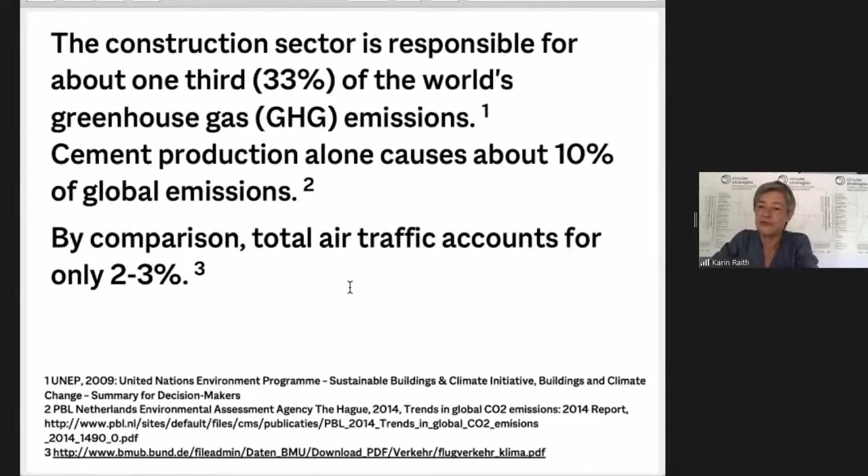In recent decades, not only have more and more natural resources been extracted from the environment, but also more and more land has been consumed for construction. This is, of course, in line with the logic of continuous economic growth, and is also driven by a combination of many factors - primarily exponential population growth, but also the extensive use of fossil fuels, which allows transport over longer distances and thus stimulates urban sprawl.

This is fatal because the surface of the earth is a limited resource that cannot be reproduced, enlarged, or expanded. Land is a really precious commodity. Although we know that in the future more arable land will be needed to feed the growing number of people, we allow huge fertile areas to fall victim to urbanization and be lost to food production every year.

And as the consumption of land through urbanization has accelerated, nature has also been pushed back at the same pace. We are well aware that the natural soil, with its ecological functions, is absolutely essential for human survival. Nevertheless, we thoughtlessly waste it for scattered development and the immense traffic areas required in between.

So what can we do? What can we architects do? As already mentioned, the global construction sector is responsible for about a third of global greenhouse gas emissions. Roughly half of this is caused by the operation of buildings, and the other half is related to the energy used for the production of the buildings. It's important to pay attention to both aspects.

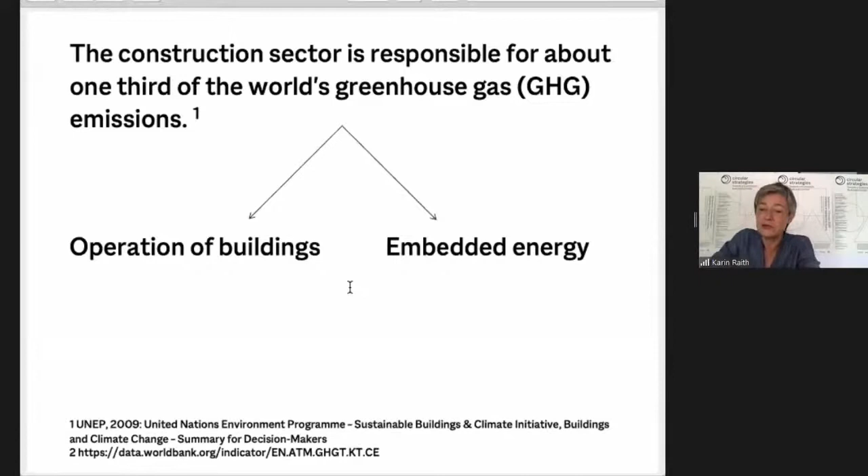Some argue for a dematerialization of architecture, because lightweight construction would reduce the amount of material put into the built environment. This would lead to a reduction in both the extraction of natural material from the environment and the embedded energy in the buildings. If we think this thought consistently to its end, then we must say the most sustainable architecture is no architecture at all. If we were satisfied with what already exists, this would be the solution with the smallest ecological footprint.

Others are convinced that it makes more sense to recycle building materials and use them many times. But there is a catch here too - recycled materials may not have the same quality as new ones. Recycled aggregates in concrete, for example, have lower performance than natural aggregates, which means that more cement may be needed to achieve the same strength, and this would increase the CO2 emissions of the concrete again. So it might be better to leave the concrete where it is and improve the intact building.

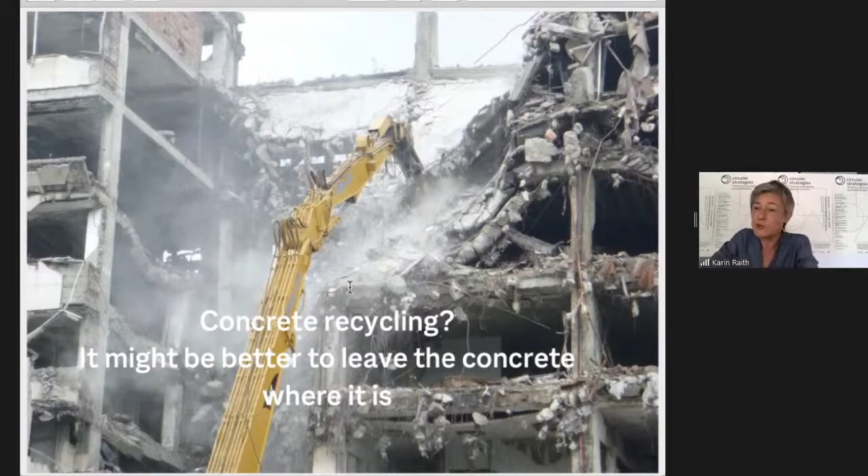Another option would be designing for durability. Should buildings be designed in a way that we can use them longer? When does it make sense to preserve an existing building? When is it better to tear it down and build a new, green one? So we see that the answers are not so easy to give, and it is necessary to weigh up arguments.

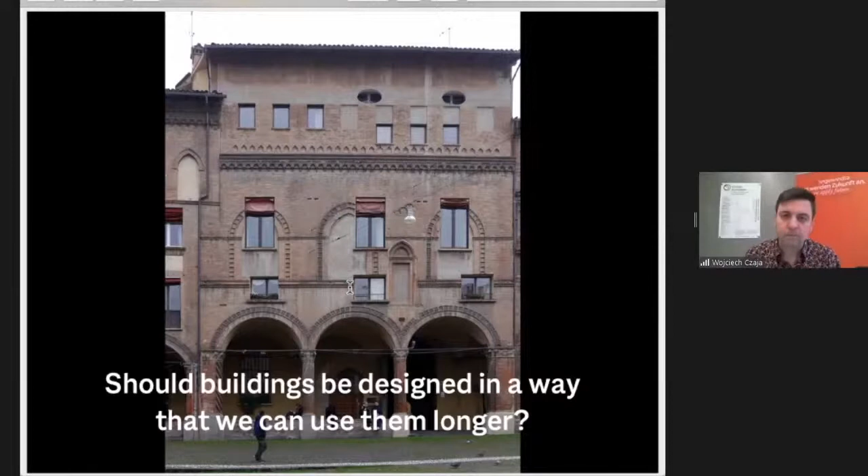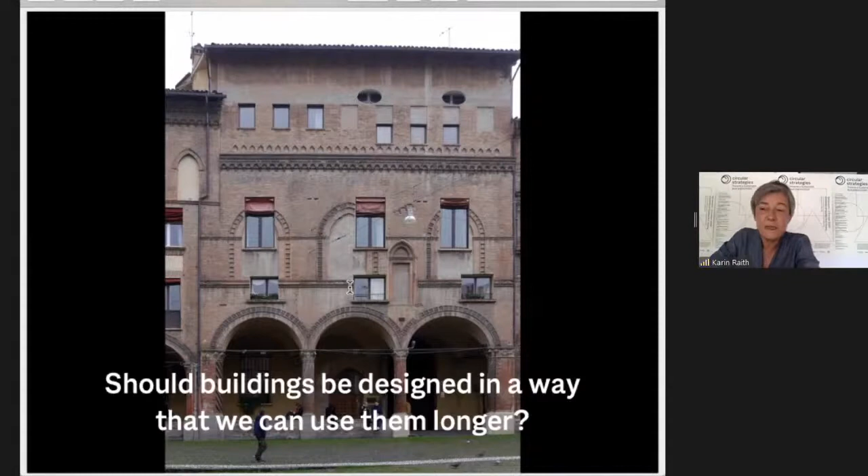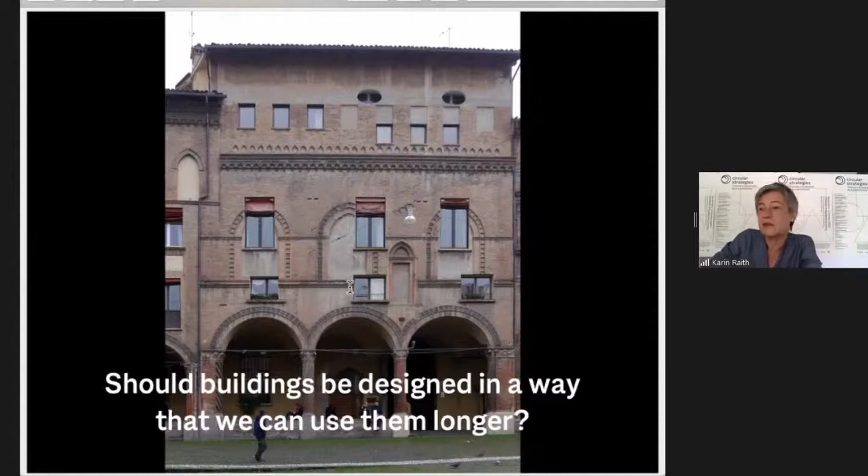Wojciech already told something about the structure of our symposium. Since different levels of scale with different degrees of complexity are involved, we thought it would be useful to structure the symposium according to three scale levels and discuss the subject from two different perspectives. First, by considering the past and asking how to deal with things that already exist. And second, by looking ahead: how can we design cities, neighborhoods, buildings and components today so that they are still usable tomorrow and can be adapted to future needs?

Of course, strategies are most effective if they are designed for the largest possible scale, ideally for the entire planet. But the small scale is also relevant because of the sheer mass of materials and components that are used in the global construction industry. Our aim should be to radically reduce the extraction of raw materials from natural sources.

Instead, exploit the reservoirs of civilization by reusing materials that have already been taken from nature, processed and accumulated in the cities. Cities are really amazing material deposits. It is estimated, for example, that more copper is now found in buildings than remains in the Earth's crust. Therefore, it makes sense to raise these treasures, which is so aptly expressed by the term urban mining. Today, Annette Hillebrandt will address this aspect, among others.

Actually, the recycling of building materials is nothing new. It has been practiced for centuries. For example, stones that had already been cut into handy shapes and were available on site were preferred to stones that had to be mined and transported over long distances. And what was sometimes also important, a connection to history could be established by using its relics and benefiting from the dignity or grandeur of the past.

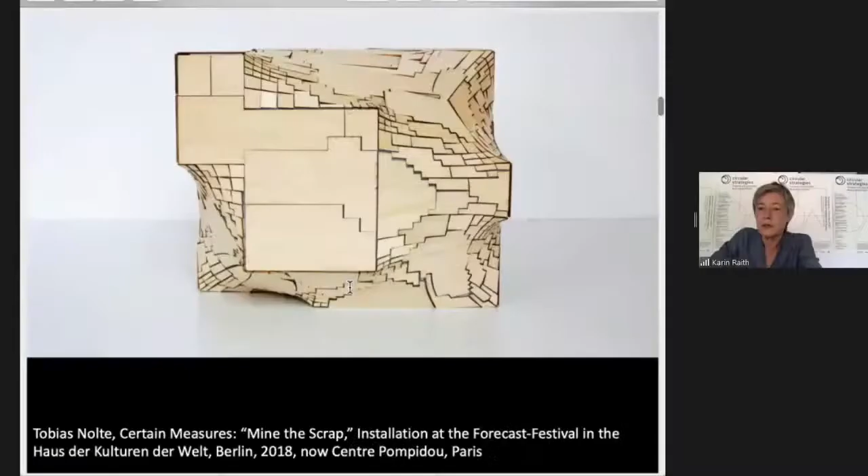In order to benefit from both the material and the specific shapes of architectural relics, about three years ago, Tobias Nolte experimented with a software that can identify the geometry of the parts and then arrange them in new configurations. Here you see a successful result, his installation, Mine the Scrap.

As I have already suggested, the reuse of building materials is not only relevant in terms of CO2 reduction and the conservation of primary resources, but also has a cultural and political dimension.

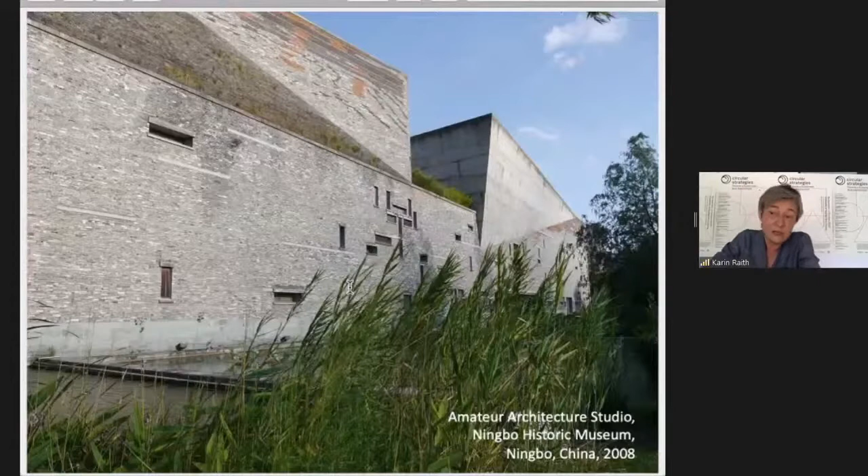When the Chinese architecture practice Amateur Architecture Studio reused the rubble of destroyed villages that had been forced to make way for hasty urbanization in China, this was both a practical consideration and a manifesto. It preserved the memory of the destroyed everyday culture and its crafts. It made people aware that the skillfully manufactured components with their long tradition had not only a material value, but also a cultural significance.

I personally have the impression that the efforts of Wang Shu and Lu Wenyu marked a turning point in dealing with the past, and that many Chinese architectural offices today refer to their practice and architectural ideas. Perhaps even O office - we will learn more from Yin Jiang this afternoon.

When the layers of building elements are glued together, they cannot be disassembled into their individual parts after the end of the first life cycle and will become waste. So if we want to prepare the components for future reuse, we have to avoid inseparable composites.

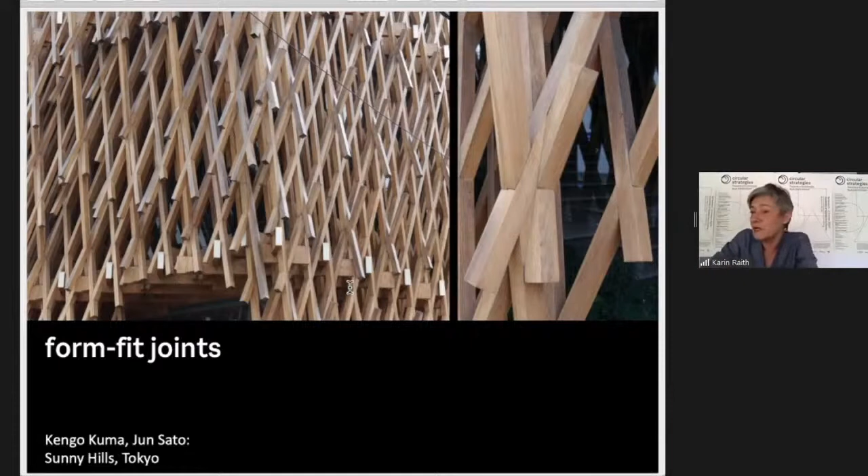We must rethink the joints and connections and move to a consistent design for disassembly. This is also a very important task. Therefore, I'm convinced that these requirements will give rise to a new culture of joining with its own design language.

On the scale level of the individual buildings, circular strategies concern, on the one hand, the adaptive use of already existing architecture, and on the other hand, the intelligent conception of new buildings with regard to their long-term usability.

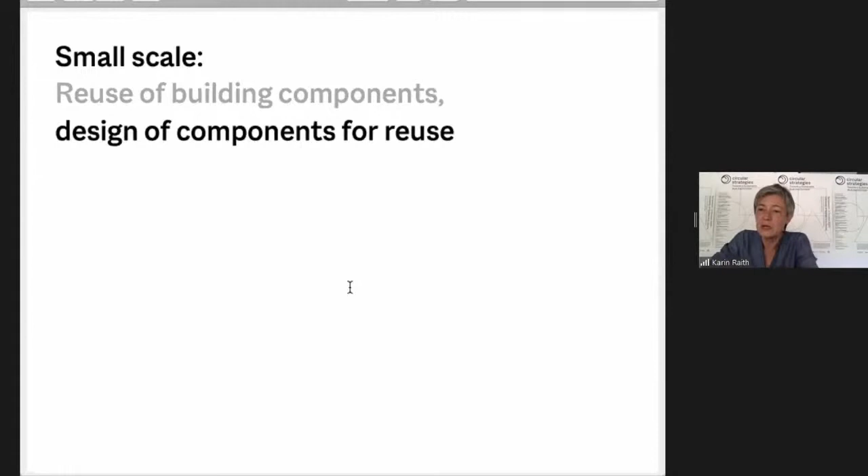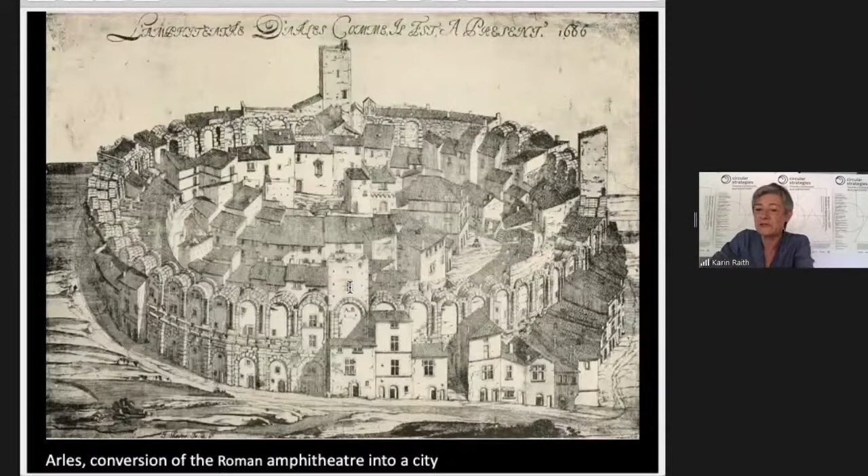The appropriation and adaptation of existing buildings is not a new thing either. It has been practiced repeatedly throughout history, especially in times of crisis when raw materials were expensive and little energy was available. The challenge today is still the same: to improve buildings and adapt them to changed social, economic, cultural, and ecological requirements, while investing as little material and energy as possible.

When existing buildings are reinterpreted and supplemented, we can see that this often enriches the architecture in an amazing way, creating a complexity and tension that the original building did not have. An example you can see here, Lina Bo Bardi's Sesc Pompeia project in Sao Paulo.

In this respect, reuse does not mean a restriction of creativity, but rather a different approach, an approach that requires specific design skills.

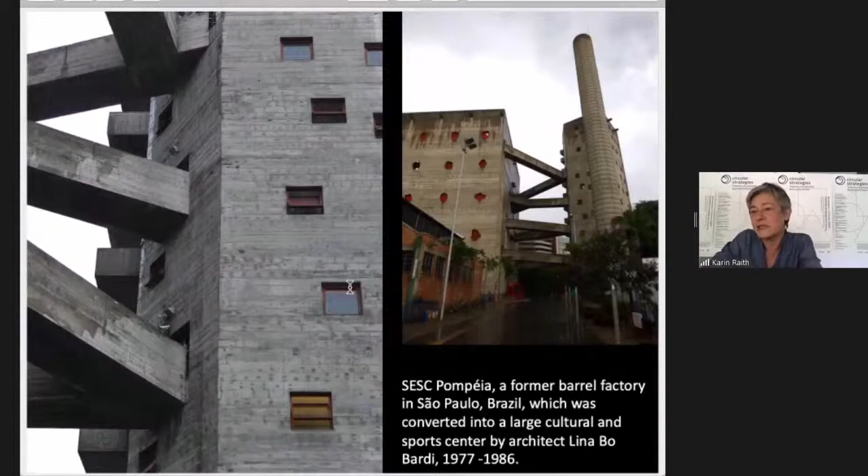Even banal and unsatisfactory architecture does not have to be torn down and replaced by completely new structures, but can be upgraded, as the work of Lacaton Vassal impressively demonstrates. For us, the architects are important pioneers and role models of circular strategies, and we borrowed their motto today.

The conversion of these three residential blocks in Bordeaux has recently been awarded the EU Mies van der Rohe Prize. An unpopular, unattractive social housing complex has been converted into a high standard apartment block with about 50% more living space and 60% less heating costs, at less than a third of the cost of demolishing the existing building and constructing a new one of comparable standard.

This proves, I think, that astonishing leaps in quality can be achieved and that this also pays off economically.

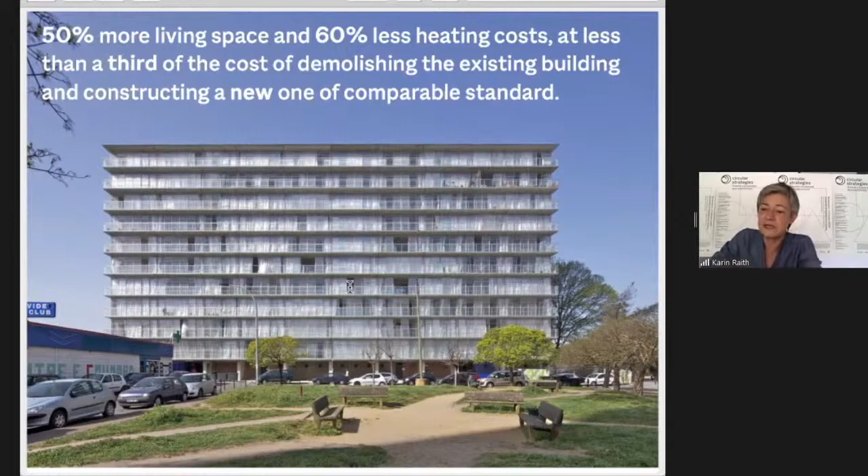Not to mention the employment aspect of the more labor-intensive conversions. So how can we program a building today for reuse in the future?

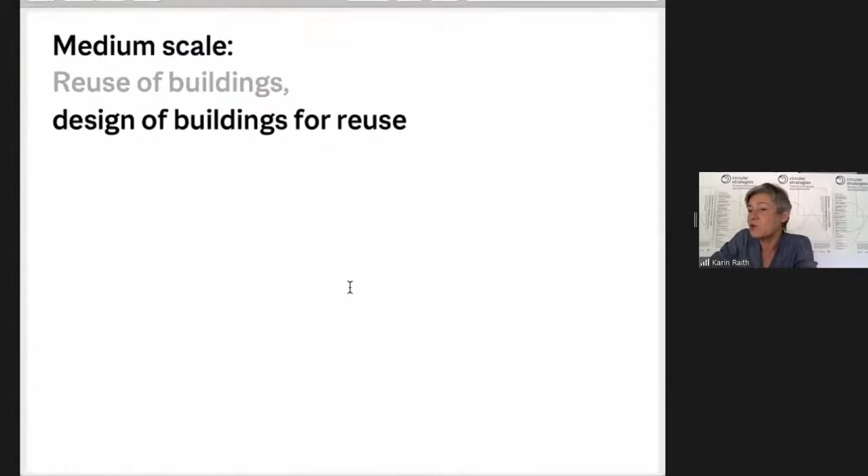Should it be a modular structure that can be dismantled and rebuilt differently? Or shall we rather design a building that is open to use, because there are enough neutral, more or less unprogrammed spaces that can be appropriated by the users in different ways? This, again, is Lacaton-Vassal's approach.

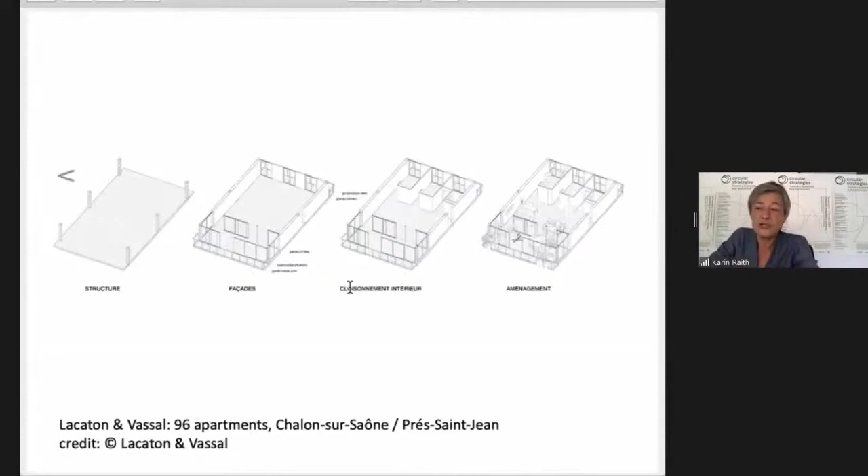Ideally, the spatial units can not only change their function for apartments or office or something else, but also their configuration, by subdividing them or merging them into larger units. For sure, there are many more approaches. I come to the last scale.

At present, we are observing the phenomenon of the so-called donut effect in villages and cities of various sizes. Low density settlement expansions pour into the periphery - supermarkets, all kinds of commercial buildings, and immense traffic areas - swallowing up agricultural land, while the village centers are neglected, abandoned, and fall empty. The infrastructure decays, economic activity declines, and social life erodes.

Therefore, we must radically reduce development of additional urban areas as long as there are vacancies and insufficiently used building stock. We cannot take any more time. The situation requires a radical rethinking. We must ensure that cities can adapt to change through continuous adjustments in their interior, that poorly used areas are recycled, that existing neighborhoods are improved, and that the city will only expand outwards if rapid population growth requires it.

To sum up, we think that circular economy in architecture and urban planning is a promising way to counteract a number of pressing problems: climate change driven by the enormous emission of greenhouse gases, the scarcity of natural resources, the waste of precious land. The tasks facing architects and designers are complex and demanding, but we must see the challenges not as constraints, but as an opportunity to develop new design methods.

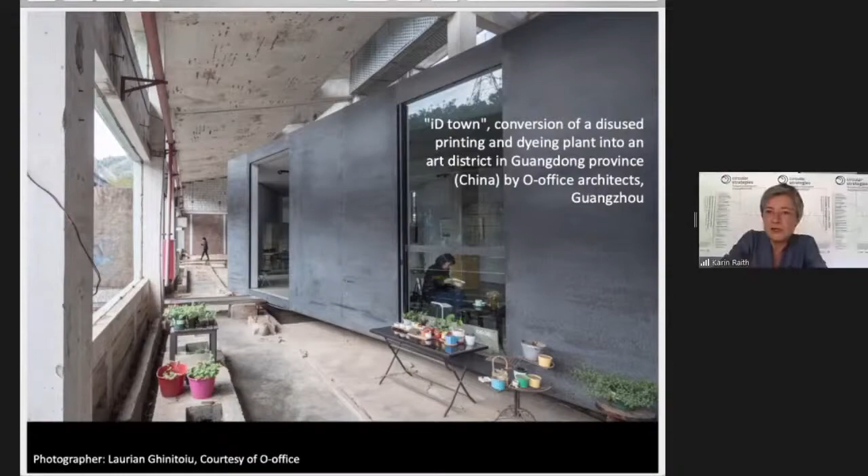Mm-hmm. So something happened with - I stopped my screen. Okay, something happened with my screen. Everything is black. Now I can see you again.

Thank you. So now we will come to our first of two keynote speeches. I will ask Helga Weisz to start with a step back in history. She will talk about energy revolutions and material cycling in Earth and human history. So she will go back to the Homo sapiens history.

I don't know how many thousand years she will go back, but she will tell us a little bit about the impact of human society, impact of building shelter and building cities throughout the last years, throughout the last thousands of years, and when exactly it changed, and from what kind of point we, let's say, build up a certain inequality and imbalance of energy that we take and energy that we give. Helga, Potsdam Institute for Climate Impact Research at the Humboldt-University, Berlin, Germany.

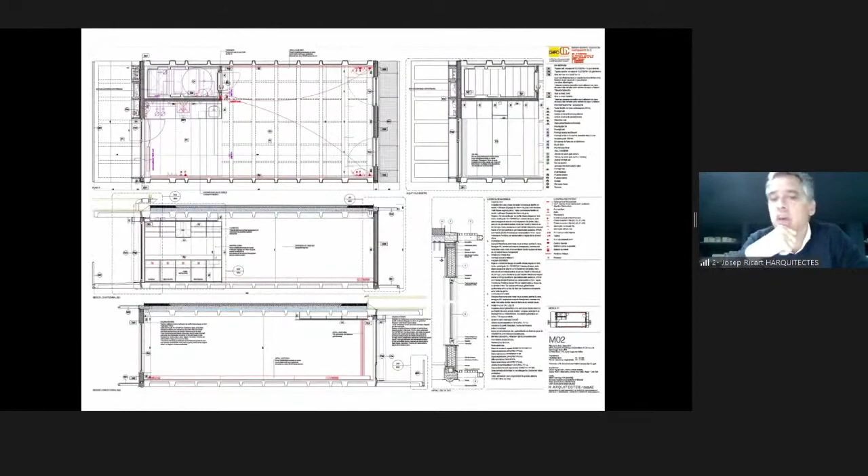The same with this garden. This is a student's residence close to the architectural school in Barcelona, well, in Sant Cugat, where two of us teach. We just design conditions, but we preview, we project life in terms of performance, thanks to the behavior of the building.

Third idea: we have discovered - well, of course our discoveries are really amateur, so maybe naive, but it's 20 years of dealing with this idea of searching in the nature of the building itself - how it can produce and propose comfort conditions that cannot get broken.

And in this way, we have discovered how important the air is, because the air is that kind of interface that gives conditions to the building as a climate and gives conditions to the user, because in between the architectural decisions and people, there's air.

This is something naive to say, really something obvious, but I want to make a reflection in this sense: it's because the air is transparent, let's say invisible, in a society like ours where visual perception is so important, maybe the basic perception system, that we have decided, let's say 75 years ago, that as we don't see the air as a part of architecture, we have decided that it's not important.

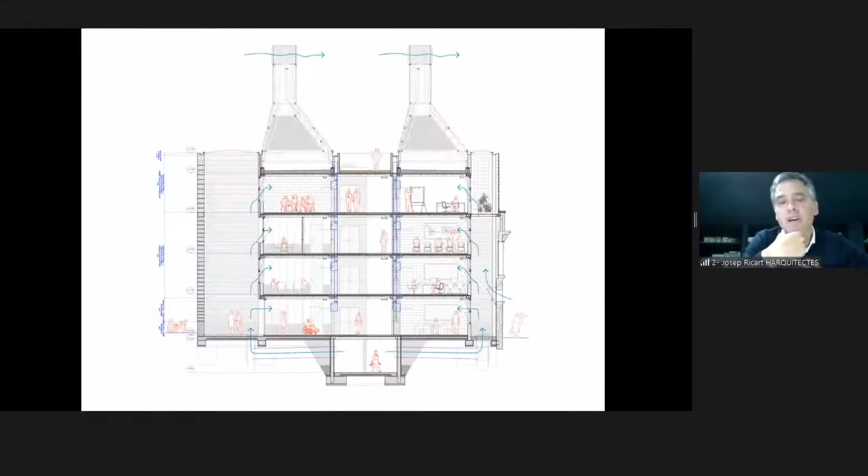Like in this building called Cristalleries Planell. This is a civic center that is part of heritage too, because it's a pre-existing glass craft industry, where we have tried to give comfort conditions based on the nature and the behavior of the construction. This is a very basic and very easy to understand system based on inertia.

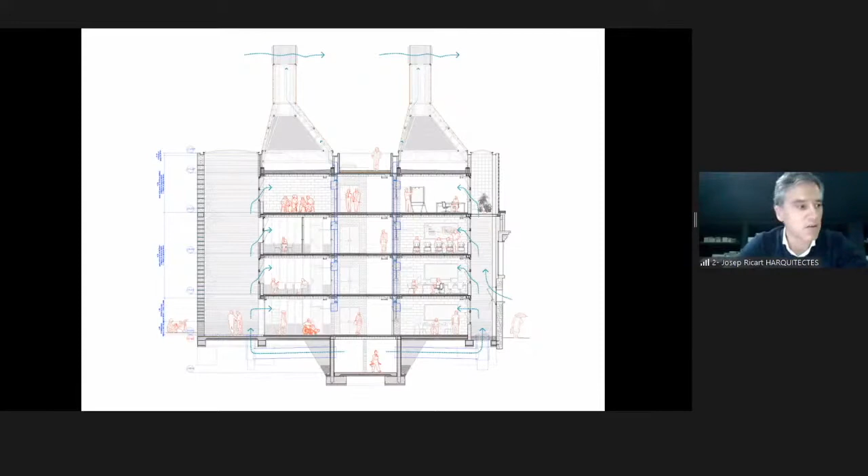In our climate here in the south, in a Mediterranean climate, the day average and the seasons average change a lot. We really believe the perfect mix between architecture and comfort conditions is to work with inertia and natural cross ventilation. The inertia is that amount of mass that helps keep the excess of heat or humidity and gives it back when you need it.

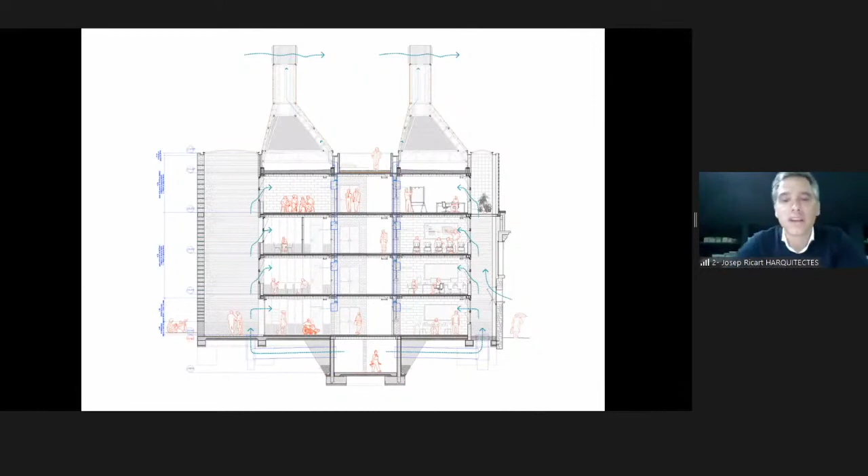This is only possible if during the nights you have cross ventilation that takes off the building that excess of heat that the inertia has kept during the day. In this building it's basically structural walls with a lot of inertia, helping to make the temperatures as soft as possible.

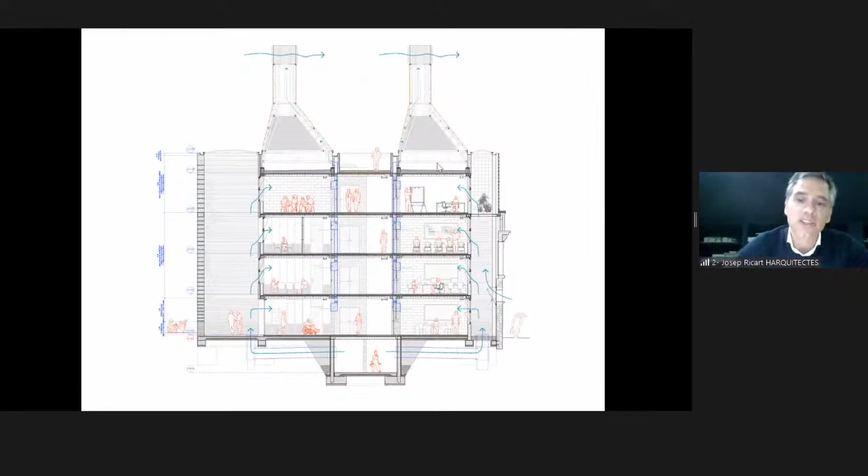But the challenge in this building was that to get cross ventilation—as this is basically a classrooms building—it's not possible to get real cross ventilation because of the central corridor and the noise. We tried to place here, and this is a public facility, which is not easy, we placed here what is a natural engine.

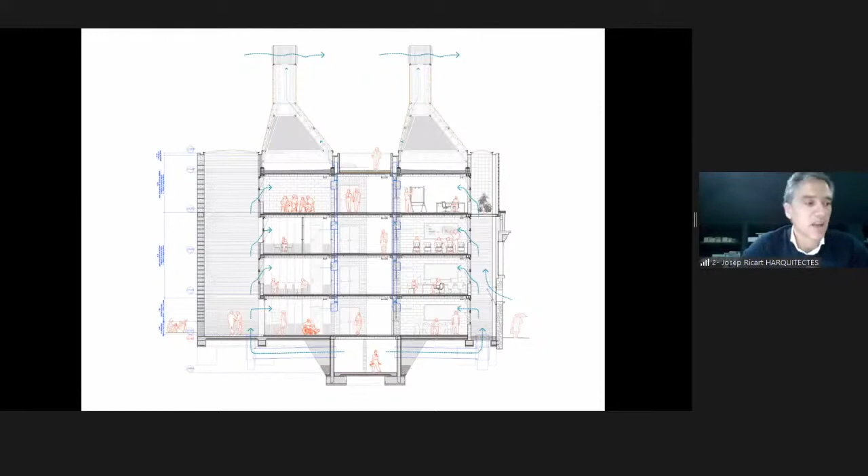It moves 15,000 cubic meters of air per hour, and is based completely on geometrical and material conditions, because this is a solar chimney, but it has no engine at all—it just works by its natural shape, because of the greenhouse effect, the Venturi effect, the chimney effect, and so on.

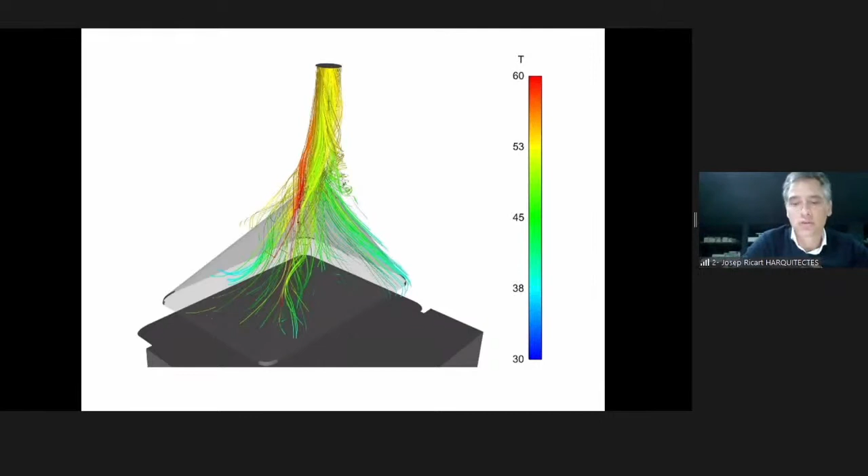Of course we need the help of engineers to do a lot of simulations in terms of thermodynamics, but we try to find engineers that have the same idea that we have: to give maximum comfort possible with something that never gets broken, like geometry and material.

We really believe that in terms of sustainability, the target is not the object, the target is the use that we get from the object. Of course it's obvious that car, fuel, gas and so on is a waste of energy and a problem for our system and for our planet.

But the pre-existing material, the pre-existing non-efficient objects around us, like buildings, we have to understand the problem is not the object itself, because if the object, by the time or thanks to the number of people that use it, or thanks to a second life, can become something less problematic, then something very inefficient and wasteful can become less of a problem.

For our planet, we try, when it's possible, to use low embodied energy materials and products. But for us it's far more important, especially in our climate area, that idea of the use of inertia.

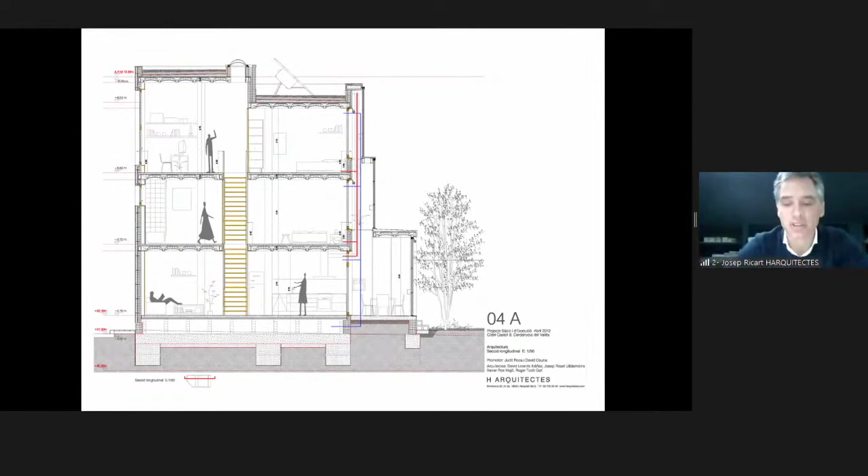Inertia is very difficult to achieve with timber systems and so on. So in our buildings, in general, we use structural walls with bricks—products that come from a high temperature process, which is not very interesting in terms of energy and climate. But we try to produce that idea of natural behavior objects that can stay in place as long as possible, thinking always about how the user has to become part of the process, using the architecture to produce

natural conditions inside, like in this case, which is a south-facing gallery, the only source of heat for this house. This is a house with no heating system, very well insulated, with cross ventilation, where the south facade works as a gallery in winter and as an open facade in summer. It's the only income of energy to the house.

It works perfectly well, but thanks to the idea of use—because this house only works this way if the user has that knowledge, or that complicity, to use the object in a proper way.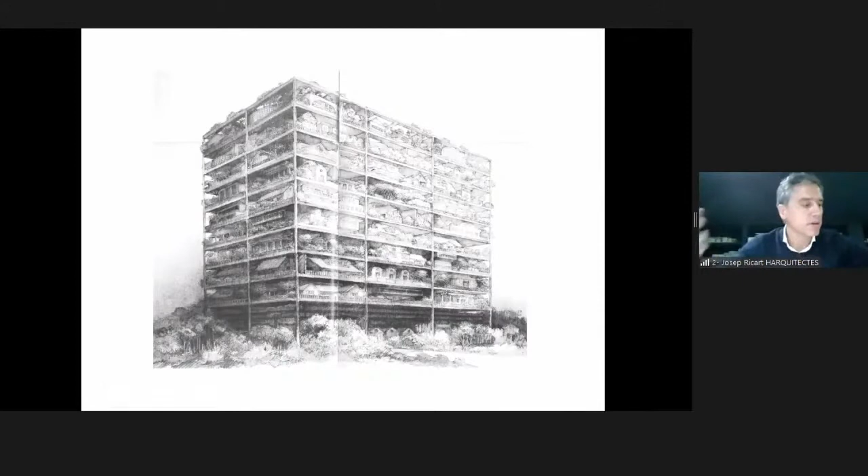In general, we are not far different from the rest of the architects. There's a lot of complexity in our projects. We try to solve every problem. We try to introduce in the big arithmetic of the project the demands of the client, the demands of norms, laws, climate, geometry of the place, and the budget, and so on.

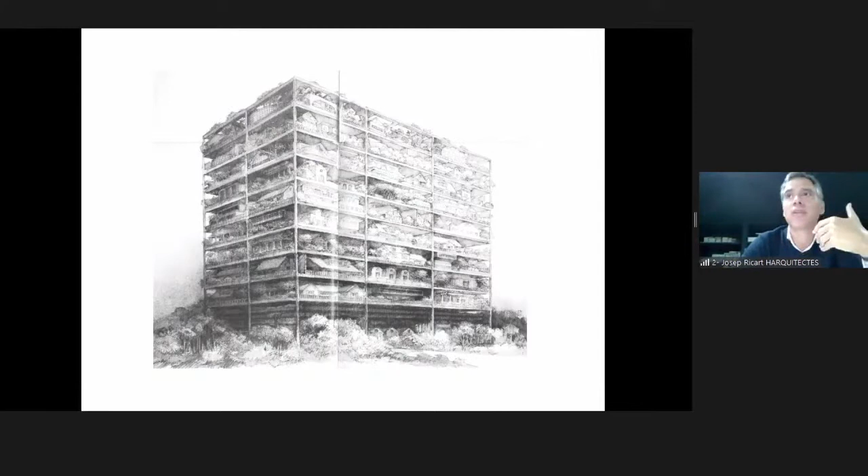Maybe what we think is characteristic of our strategies is that we try to use the basic parts of construction, which are structure and enclosure, to perform in a higher number of behaviors possible. We ask the structure not only to support the living of people, but also to become, thanks to the inertia, part of the comfort system, thanks to the shape of the structure, part of the acoustic comfort, to be part of the active system by activating pavements or slabs, and so on.

And the same with enclosure, asking the enclosure to open and close, and not to be only the rainproof layer of the building, but also to be part of the comfort system by producing cross ventilation, by producing shadows, and so on. So that's the concept of that idea, which is to transform the elemental parts of the building into fundamental parts of the building.

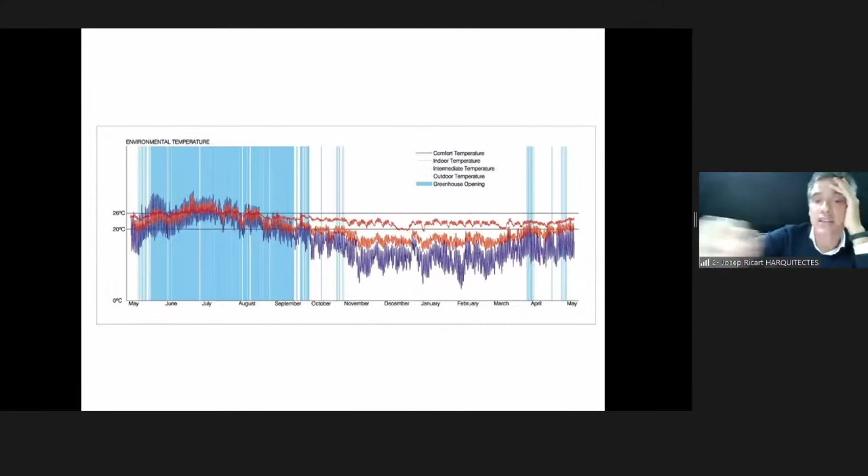Like in this case, where the structure of this building, which is heavy, which is based on cement because it's concrete, which is no good in terms of material for the environment, but thanks to that idea of becoming fundamental, because it's not only the structure, but is also the inertia that gives that balance to the outside temperatures.

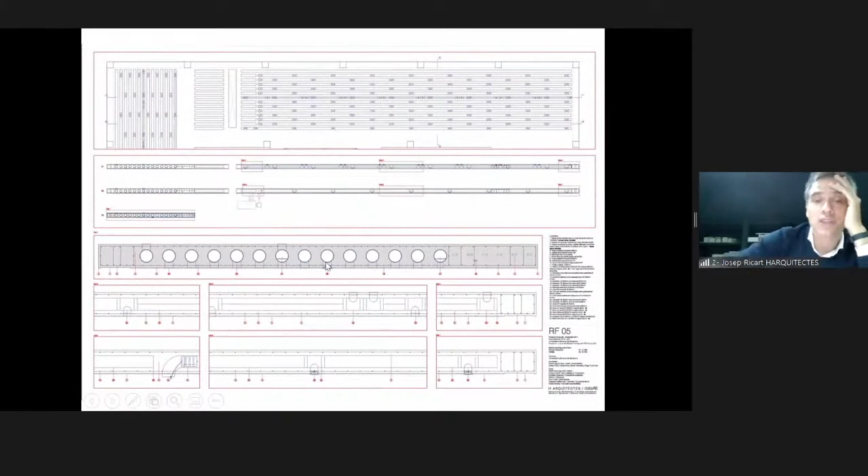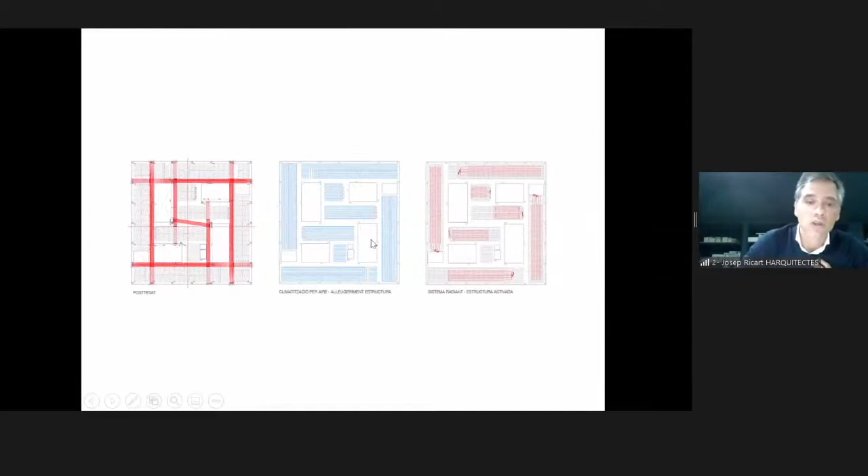And also it's the system that produces the inside ventilation because of these pipes introduced in the slab, or because it's part of the acoustic comfort system because of the shape of the concrete surface. And it's also the active system because it has active pavements and active slabs with circuits of cold and hot water. Suddenly that elemental part of a building became something fundamental, something, let's say, forever.

And that building assumes that there's a part that is renewal, that can be changed in time, like the enclosure, but there's a heritage part of the building that can be there forever because, and this is important, it will work forever. Not only as a structure, because structure is cheap to be demolished, is cheap to be changed.

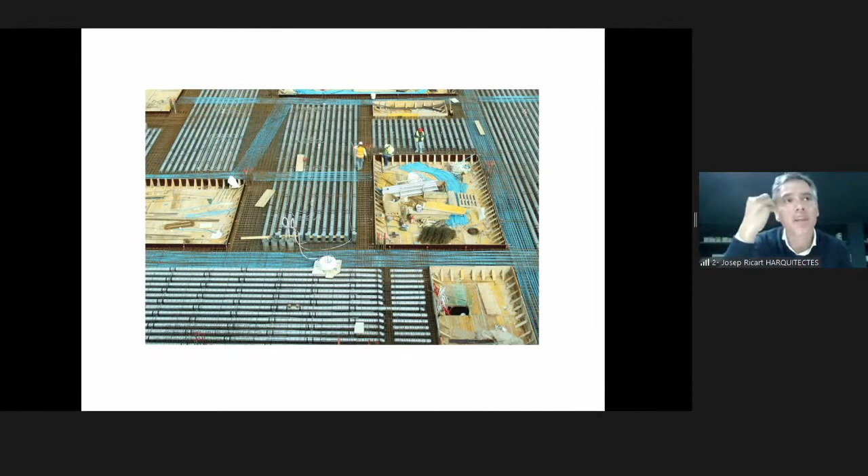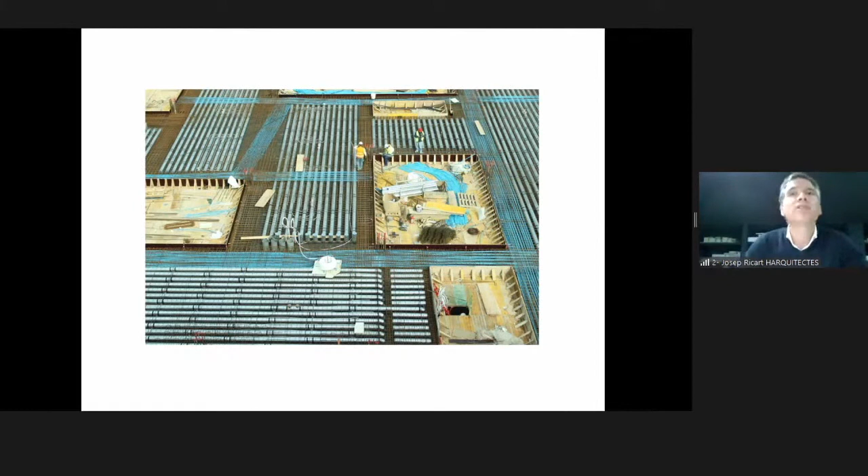What can make people think again about why we don't have to demolish something is when that something keeps working. And the work that we have to ask of architecture is not just a support work, because this is very easy to be changed in future. For sure, there will be better structural systems. But if this system is part of the comfort, and the comfort is based in the nature of the system, then it won't be so easy to take the decision to demolish that.

Ignacio Paricio talked about two kinds of construction systems: the multi-layer systems, where every layer is very specific, very specialized to give an answer to a problem of comfort, in front of that kind of construction where space and structure is the same thing, where structure and the geometry of the space is the same part of the building. That is the traditional construction based on structural walls and so on.

What Paricio says is that both systems can work very well and are different, but there's no one better than the other. But what Paricio says, which is very interesting for us, is that that second system, where structure and space are the same thing, can age organically.

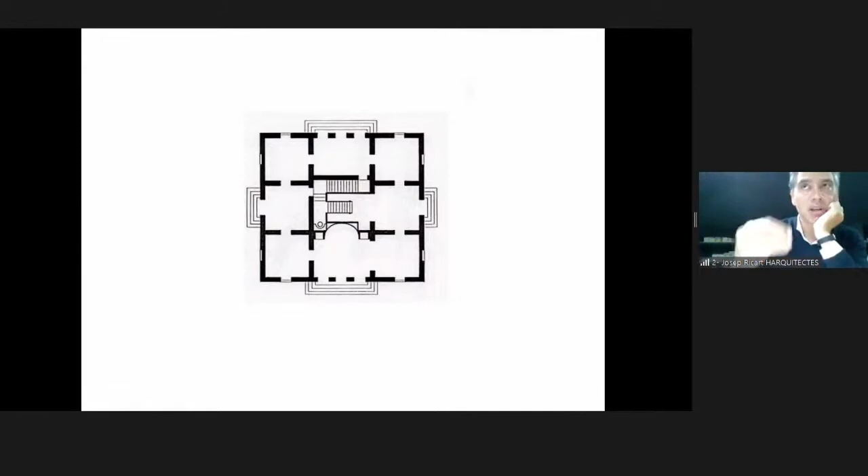When we were young, we discovered this concept between structure and space, just crossing the Charlottenburg Pavilion, or Schinkel, discovering that idea of the relation between space and structure. I'll show you - we've been dealing with that idea for the last 12, 15 years.

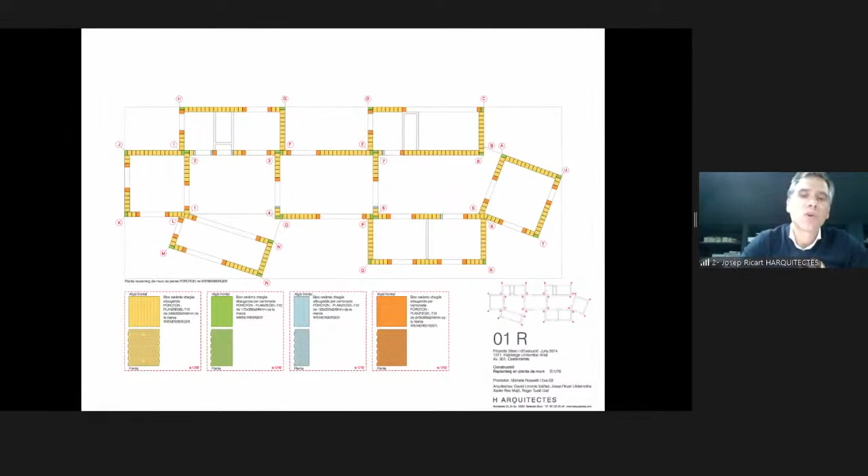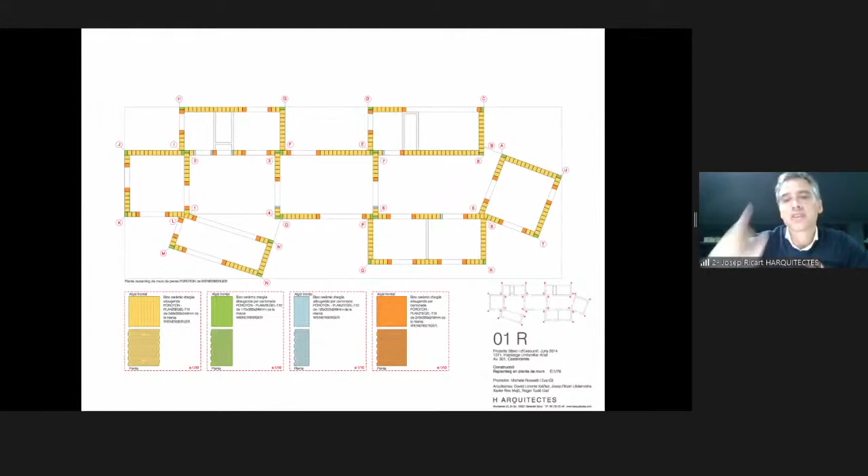Now we are at the idea that we can get that kind of architecture with one layer system. This is a house we've done - just a structural walls house, nothing else than one wall house. So the one wall house is a house with just one layer facade that can work as a rainproof system, as an insulation system, and also as a structural system. Of course, it also gives the geometry to the inside spaces. Coming back to that general concept, the umbrella of the ideas I'm talking about - the nature of the building - we developed a lot with this house.

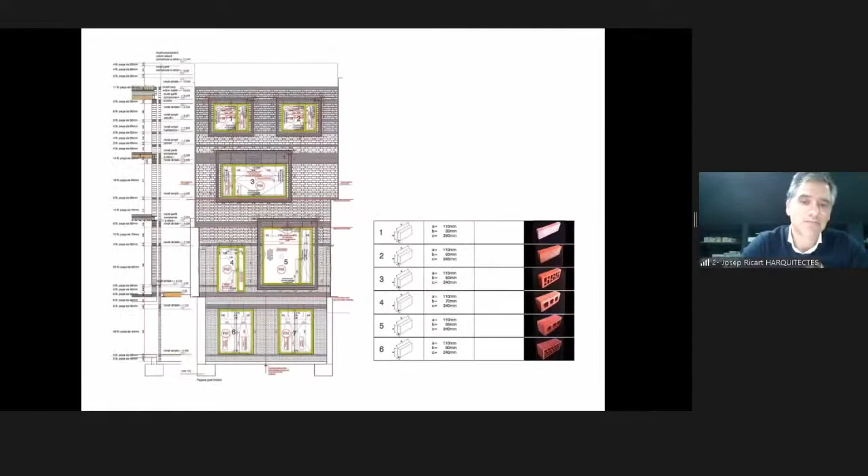But I want to show this house as another idea that for me is very nice, and it's not from us - it's from Jacques Sondelat, the French architect who in the 80s talked about an idea that's pretty important for us. In this house I think it's well shown: the idea that the good place for living is not - he said that functionalism is against the freedom of use. For me that's a surprising sentence, because functionalism and freedom of use are the basic topics of modern and contemporary architecture.

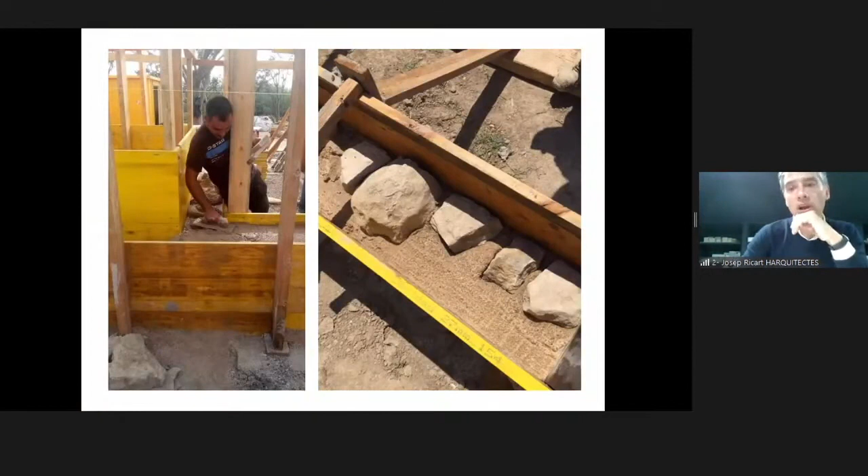And we've done a one wall house with the same stones, linked with the same strategy, a large porch glued to that new wall. It's a monoblock wall like the house I've shown before.

And after the process, we just smashed a little bit the surface of that cyclopic concrete wall to recover the image of the old stones that are now placed just 1 meter away because of the council, but recovering the memory, giving the pre-existing material a new chance to perform — not only to give memories, not only to have a cultural performance, but to give conditions in terms of inertia and geometry to the performance of people into this house. And that will be all.